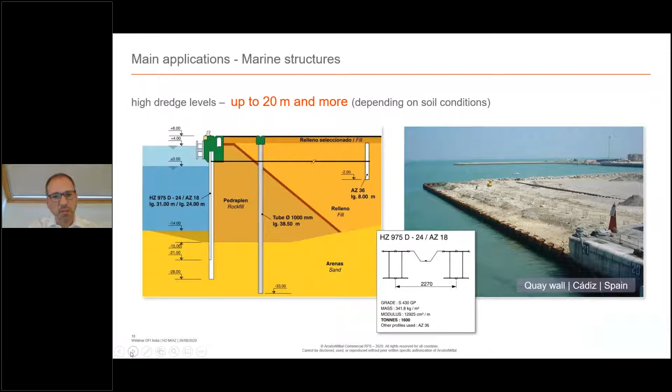And for flood protection systems, here it's a typical case where a standard sheet pile wall would have been possible, but in this case it's a cantilever wall, and so in order to reduce the deformations at the top of the sheet pile, it was decided to use a combined wall system due to its much higher inertia. So relatively small retaining height, but due to deflections, they used this type of solution.

The installation is made in a different way than regular sheet piles, so you need a template to install the sheet piles, and there is a specific driving sequence that you have to follow in order to do it correctly.

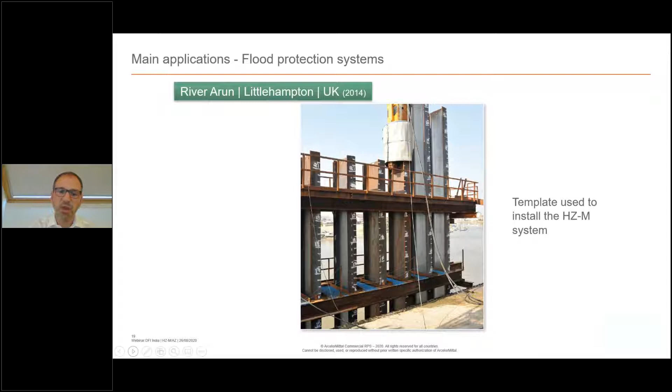Now, another type of application is bridge abutments. Normally, again, regular Z piles could be used, but in this case, very high loads, and you transmit also the loads from the deck to the sheet pile so that they can be transferred to the soil. So it's not only a retaining wall, but also a bearing pile, acting also as a bearing pile.

And now, temporary structures with this type of combined wall system are not used that often, but in very severe conditions, like you see it on the right, it's a very old picture of a cofferdam in the middle of the water where they had over 10 meters of water pressure. So they decided to use a combined wall system.

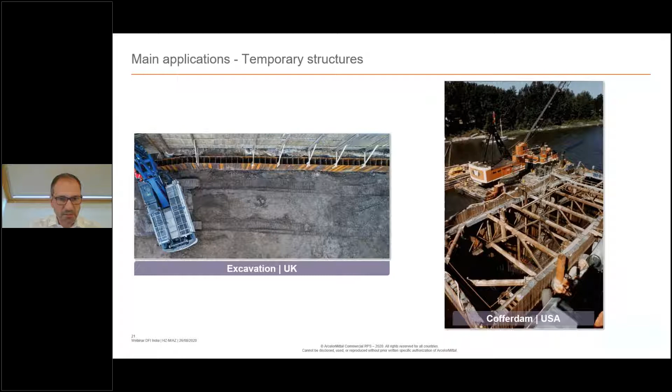But the sheet piles are very, very long. So here, the longest were up to 44 meters long. So you have also to imagine the equipment that you need to be able to drive such a long sheet pile into the soil. So this is also something that will be dealt with in one of the next webinars, a webinar with Mr. Ernst, who will focus on the installation.

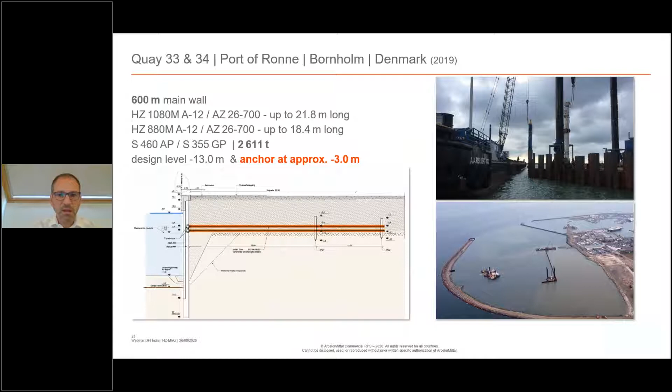Another interesting feature of the HZM system is when you have to dredge deeper. Here, for instance, they wanted to increase the dredge level by about 3 meters.

So here you can see it now normally, the deck on pile, and they wanted to increase the depth by about 3 meters. So the solution was to select a cantilever wall, which is relatively stiff. It was an HZ system, which was driven below water. The top of the sheet pile was at the existing dredge level. Once they had installed the sheet pile, they dredged in front of it so that it was a cantilever wall.

Now, what are the standards and recommendations that should be used when designing a sheet pile wall? In Europe, we use Eurocode 3, Part 5 for the piling, for the steel, and Eurocode 7 for the geotechnical design, that's Part 1 of Eurocode 7.

There are also standards relevant for the sheet piling, hot rolled steel sheet piling, the technical delivery conditions and the tolerances. This is very important. The execution of special geotechnical work is detailed in EN 12063, but we'll see that for combined wall systems, for instance, the tolerances are not dealt with in detail in this standard.

And then the types of inspection documents that you have to prescribe so that you get the correct material. There are also recommendations from the Committee for Waterfront Structures, Harbor and Waterways, the EAU as we call it in Germany.

Very interesting, very detailed, and they use a lot of steel sheet piles in Germany, so they have a lot of experience. This is the 8th edition, if I'm correct, so they improved it each time.

What they also have is the EAB, which is more for cofferdams. So if you're doing something on land, then it would be EAB. And then in the Netherlands, although this is only available in Dutch, but also very detailed for the design of sheet piling,

So focusing on the combined wall system, HZM, what is a combined wall system and what is particular about this specific one? The combined wall system consists of 3 elements. The first one is what we call a king pile. This can be an HZM, like in this case, but it could be something else. It could be a box pile, like a CAZ box pile, or it could be a tube.

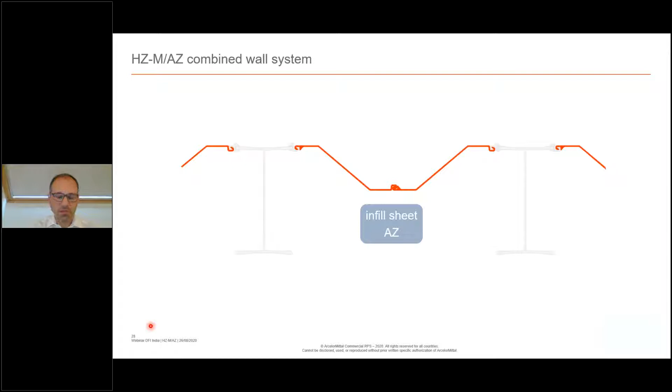And then you have infill sheet piles. In this case, we use exclusively AZ sheet piles. We will see also why AZ sheet piles are better in most cases. The third element is the connector. It's also a hot rolled connector, and it's partially welded to the king pile.

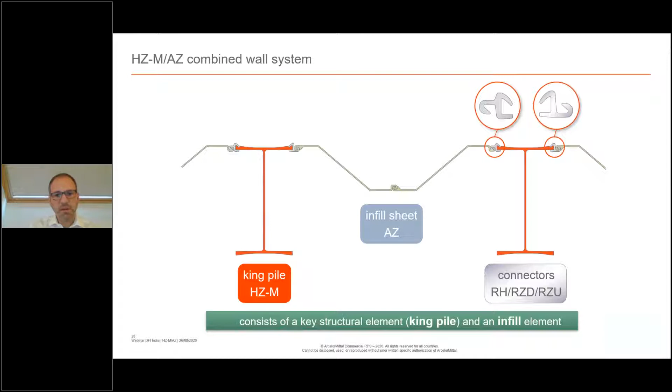So this is how to combine these different elements and how to build a continuous, and could also be watertight, sheet pile wall, as we'll see in one of the slides. So, king pile and infill sheet. If we focus on the king pile, the system is not that new. The first HZ was developed in the 70s, early in the 70s.

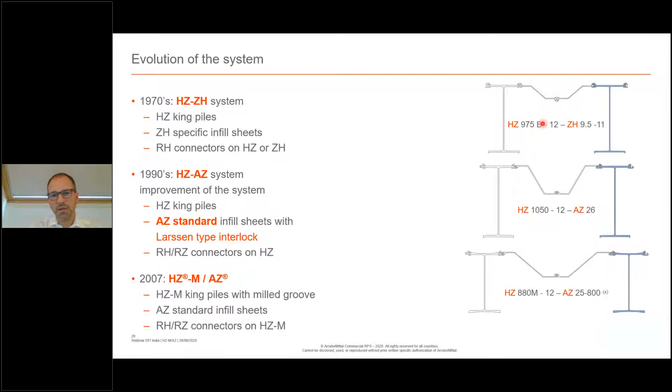But as you can see here on the top, the infill sheet piles were specific for this system. Later, with the development of the AZ sheet pile, we switched to a regular infill sheet. So it's something that can be used not only for the combined wall system, but also for a standard retaining wall. Later, in 2007, for a very specific project, we developed much more resistant, thicker king piles, but keeping the infill sheets, still the AZ, and the same connectors. So it's an evolution, like in most cases.

What changed, and what is very different for this king pile compared to a section, is that it's much wider. We're talking about sections between 420 for the smallest one up to 460 millimeters wide. They're very deep, above 1 meter high for the highest one, like jumbos that are also used for high-rise buildings. Also the distinctive feature, different from other solutions, is that we have a groove which is milled, within very strict tolerances so that the connector fits perfectly in this type of flange.

There are different elements, so different thicknesses, different heights. We start with a very small one, which we call the 630. Then you have one which is a little bit higher, the 880.

And then the largest ones are the 1080 and the 1180M. As you can see, the thickness of the flanges also increases. We have a specific slide about the thicknesses in one of the next slides.

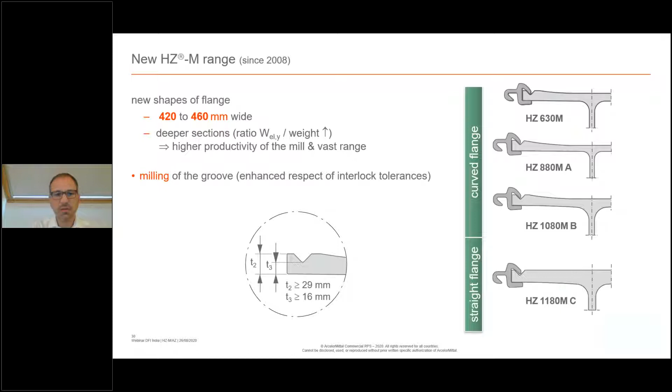The connectors, there are 2 of them, actually 3 of them. Those connect the sheet piles, the infill sheets, to the king piles. We call them RZ, RZD and RZU. It's almost the same shape, but due to the interlock type, you have to select the correct one.

And then the RH connectors are used to connect 2 king piles together, either to build a box pile, like we'll see, or to build a wall without any infill sheets, which is a much stiffer one. So the connectors are hot rolled connectors.

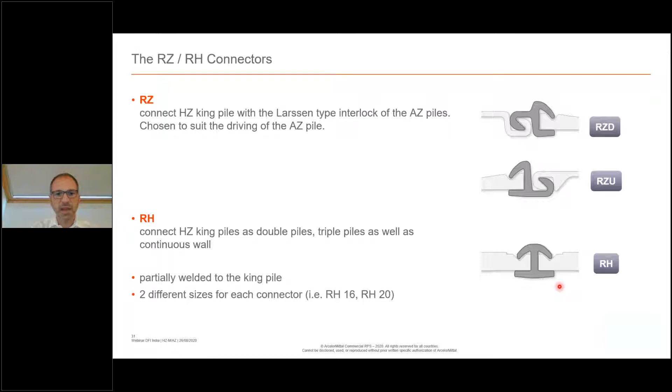They're also partially welded to the king pile, around 10% of the length. And then there are 2 sizes that are required because of the varying thickness of the flanges, in order to fit perfectly the flange thicknesses.

So in our brochure, you'll see different solutions and different combinations. So what we call a solution is simply the king pile. And as you'll see, a solution 12, for instance, is 1 king pile with 2 connectors. Solution 14 that you see here is a solution where you have 1 king pile and 4 connectors.

The advantage of a solution 14 is that it's almost a symmetrical profile. However, the disadvantage is that the connectors are a little bit more expensive and that you also need to weld them, so most of the time a solution 12 will be more cost effective than a solution 14, but you have to switch also the king pile, so you have to take a larger king pile.

And it's the same thing for the box piles that we call solution 24 and solution 26. So solution 26 is 2 king piles connected with these RH connectors and 4 other connectors.

A combination is the combination of a solution, so solution 12 plus infill sheet makes combination 12. The same thing with solution 14 makes combination 14, and so on. So relatively easy to understand. Also in our catalog, where to find these different types and what it makes.

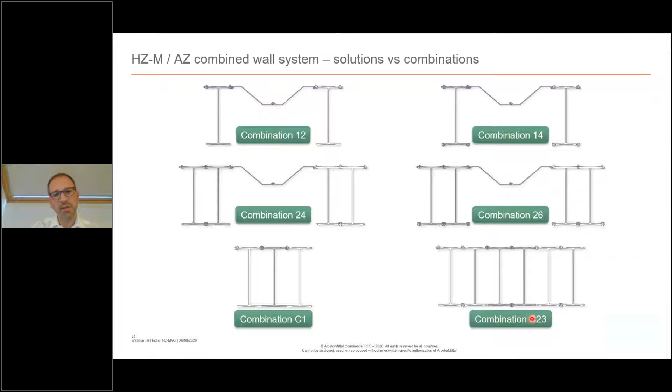So combination C1 means that you have 1 king pile that will be driven as a single pile, and combination C23 means you have a box pile that is supplied as a box pile, so 2 or even more. We have also sometimes supplied 3 HZ as a box pile, but then you also have to handle it, lift it, and drive it into the ground. So that's something that has to be taken into account when ordering and designing them.

So as I said, there are 4 different sections with different thicknesses. I won't go into the detail, but we start at a thickness of about 20 millimeters for the very small one, and we go up to about 40 millimeters for the very thick one, with the height of the section of about 1100 millimeters approximately. So there are different thicknesses for each, so that you can actually optimize the solution depending on your requirements.

And as I said, depending on your requirements, you can have a very small elastic section modulus. So here we have, for instance, a combination with 4,000 cubic centimeters per meter. This is the equivalent to an AZ40, for instance, but the inertia is much higher. So the inertia here would be about 50% to 100% higher than an equivalent Z pile.

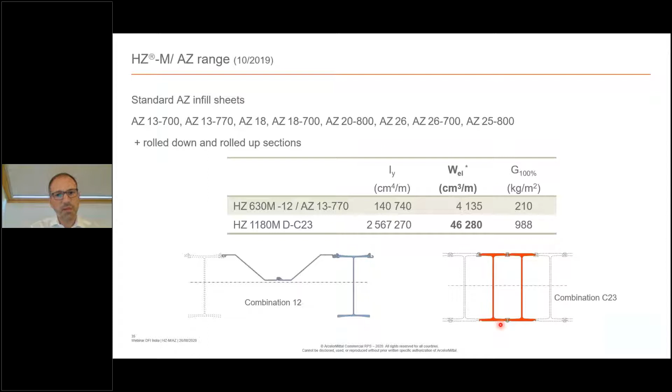And if you don't use any infill sheets, as a combination C23, we can go up to 46,000 cubic centimeters per meter for the elastic section modulus. But on the other side, the weight that you have to consider is about 1 ton per square meter. So if you take one of those box piles that is 40 meters long, this means that it's about 40 tons heavy. So you need the equipment to handle it, but also to drive it into the ground.

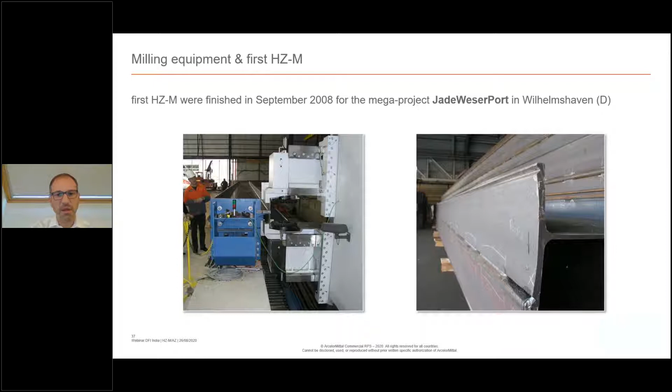So it's relatively quick and, as we said at the beginning, very small tolerances. Now, the HZM system, as I said, consists of two elements, but the infill sheet is there mostly to transmit the horizontal loads to the king piles. So the vertical loads, if you have vertical loads from a bridge abutment, for instance, will be transmitted solely to the king piles. And the other advantage of the AZ sheet piles is that they adapt very well to driving tolerances.

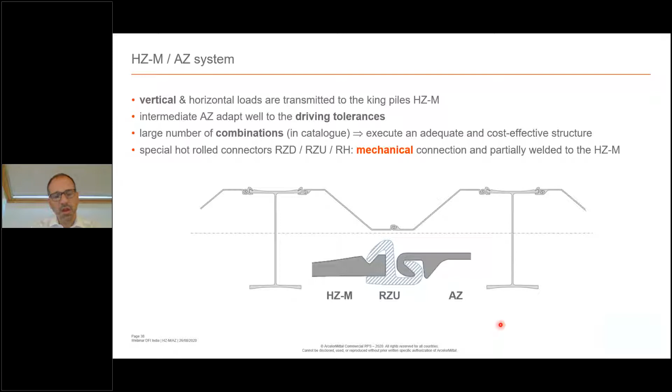The other advantage of a combined wall system, HZM, with the RH connectors, is that you have a mechanical connection. So you partially weld the connectors to the HZ, but even if it would break for some reasons, you would still have a continuous wall, which is not the case for other solutions, also with the king pile walls and infill sheets.

So how to design and how to determine the stresses in both elements. It's relatively simple, but you have to do some assumptions. The easiest way to explain this is to take the global safety factor approach, where we don't have any partial safety factor. So we have to make an assumption, and the assumption is that the bending moment of the wall will be transmitted to the elements proportionally to their stiffness.

The king pile is much stiffer, so the bending moment will be transmitted mostly to the king pile, and the infill sheet, as I said, will transmit the horizontal loads and can take a small portion of the bending moment loads. So the inertia of the system is simply the sum of the inertia of the king pile and the inertia of the AZ, and you'll find this information in more detail in the brochure.

And you assume that the bending moment is also distributed into the HZM and the infill sheets. Now, you have to calculate the bending moment that is transmitted to the HZM, and once you have calculated that, you have to verify the stresses in the HZM and also in the connectors. Those are the formulas that you see here.

It's relatively simple. In our brochure, you'll find what we call equivalent section modulus—two values, one for the HZ and one for the connectors, because they don't necessarily have the same stresses, and they don't necessarily have the same yield strengths. This is how you can calculate the stresses in those two elements.

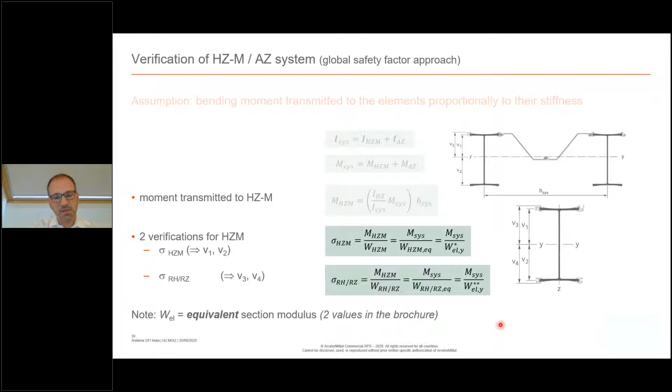What you can also deduce from these assumptions and results is that usually the infill sheet pile doesn't need to have a very high yield strength. Generally an S270 GP would be sufficient, unless you need it for driving reasons, if you're driving into very compact soils, or for water pressure reasons, as you'll see in one of the other slides.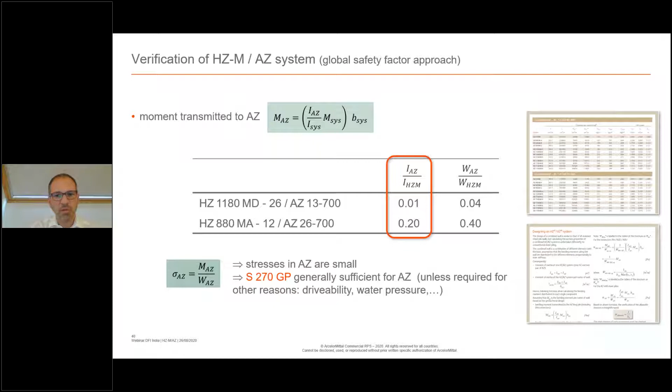All this information you can find in our brochure. You can also find it in the brochures of other manufacturers, because this is the essential data that you need in order to design a sheet pile wall. You've also seen this slide in the first webinar.

We have also supplied for some of the projects ASTM A690. That was the case, for instance, for a large project in Poland about 10 years ago. And we can also add some copper if the customer requires it.

Usually it's a little bit more resistant to corrosion in a marine environment. So as I said, all these verifications according to the global safety factor approach, not the Eurocode, can be done with the software that you can download from our website.

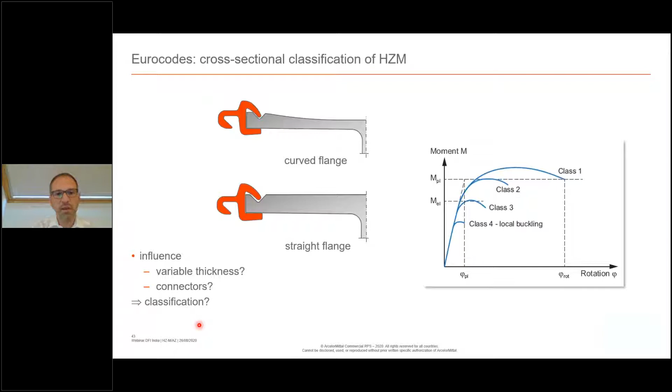This is relatively easy to determine for sections, because there was a lot of research done. But for curved flanges like we have here, or flanges which are not straight but with a connector, it does not necessarily apply. So some years ago we had to do research and testing in the laboratory, done with the University of Aachen in Germany.

These finite elements and background calculations showed that almost all the solutions were class 2, except for solution 12 and solution 24, which are class 3. This means that for all of them you can use at least the elastic section modulus for all the steel grades. Quite interesting, because it was not that easy. If you use the method from the sections alone, then some would fall into class 4.

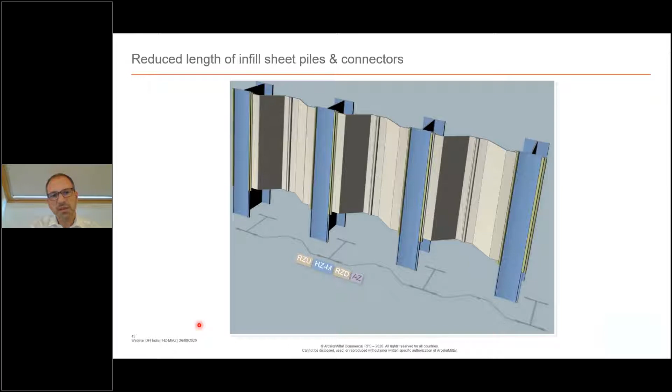Another interesting thing is that the infill sheet pile does not need to have the same length as the king pile. We can actually take into account a passive 3D effect, but this depends on the distance between the king piles. If the king piles are within 1500 millimeters, or 1.8 meters for U piles, then you can assume that it's a continuous wall.

If the distance between the king piles is above this value, and this is also given in Eurocode, then you have to take this into account—you cannot necessarily assume it without verification. You still can do verifications to make sure you have this passive 3D effect, but it's not given without any additional verification. So with this type of solution, you can save money, and also steel, which is also good for the environment.

Typically, the length of the infill sheet piles is within 60 to 80% of the length, unless you have a cantilever wall or a very soft soil.

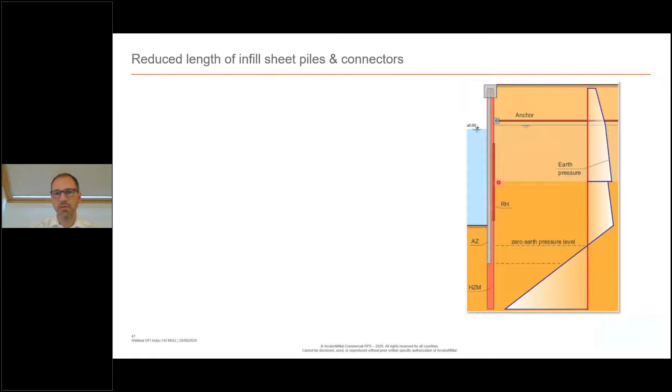Here is a cross section of an anchored wall. You see that the RH connectors, for instance, you only put them where you need this maximum bending moment. So you can not only play with the length of the infill sheets, but if you have a combination like 24, 26, or 14, you can also adapt the length of the connectors.

Normally, the tip of the infill sheet pile should be at least 2 meters below the elevation where you have the zero earth pressure level, where active and passive pressures are equal. But also it should be at least 5 meters of embedment, depending on the soil conditions.

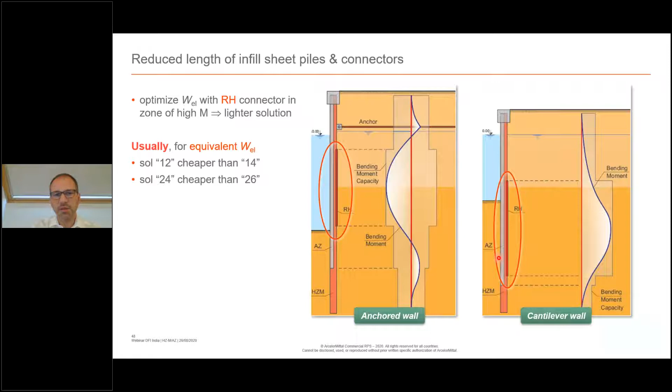I already told you that solution 12 would normally be cheaper than solution 14, but you also have to verify that the stiffness is sufficient. Solution 24 is cheaper than solution 26, 12, and 14, but as I said, you can also optimize the length of the connectors based on the bending moment.

For the infill sheets, why do we prefer Z-piles? For two reasons. The first is that a Z pile has a rotational capacity of about 5 degrees per interlock, which is not that much. But without any deformation, you can actually achieve an increase or decrease in the width of about 100 millimeters for most of the piles.

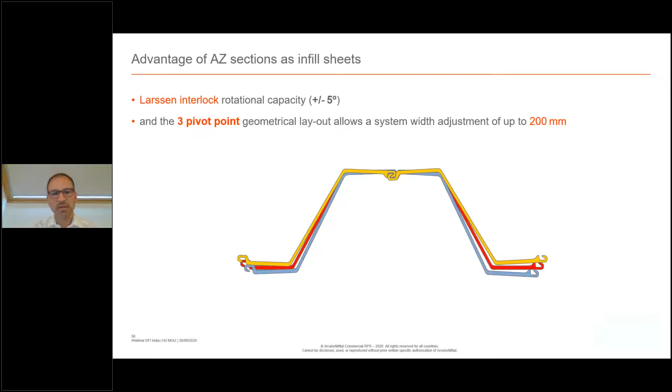With a small deformation, you can adjust it to about 200 millimeters. Based on our experience, the Z pile is better than the U pile because it doesn't have the interlocks on the neutral axis. If you are within 200 millimeters of installation tolerances, the infill sheet will adapt to these tolerances. When you drive the king piles first, you will never have a sheet pile or king pile which is perfectly vertical. There are some tolerances, but achieving zero is almost impossible. That's the advantage of the infill sheet, which is a Z pile.

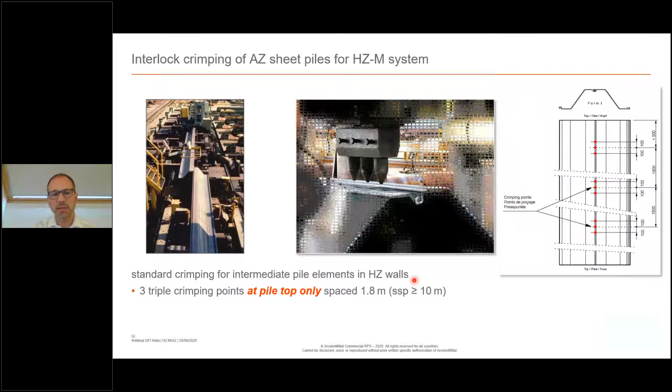However, most of the time, the infill sheet piles are crimped at the top, so you have 3 times 3 crimping points. This is more for handling the double piles so that you can lift them. You should avoid crimping at the tip because you need this flexibility in order to adapt to the installation tolerances of the Z piles.

We've seen that the yield stress of the king pile might be different from the yield stress of the infill sheet and from the connectors. So this is something you can try to optimize, because if you go to a very high strength, you have to pay a slight premium, but for the infill sheet piles, you don't necessarily need this.

The tip of the pile, you can also shorten it. It has to be at least 2 meters below the total zero pressure, and the embedment of the HZ must be at least 5 meters. We also recommend the AZ should be at least 5 meters, and most of the time it is. If you have very long piles, longer than 20 meters, we recommend using a slightly stiffer pile, not too stiff. So AZ48 700 is not recommended at all - it would be too stiff, but an AZ13 might not be sufficient to drive them. Of course, it depends a lot on the soil conditions and the installation equipment you have.

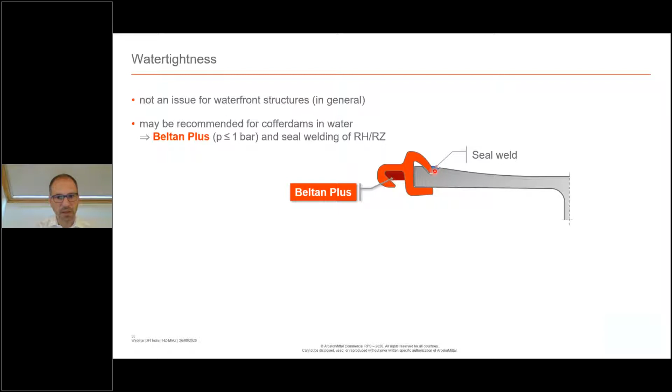For water tightness, we have also some solutions. This is typically for a cofferdam, not for a waterfront structure. You can use what we call Beltan Plus, a bituminous product that you put into the interlocks, and then you seal weld in between the structural welds. Or you have a compressive system where you use the AKILA system in the interlocks, but you also have to seal weld in between.

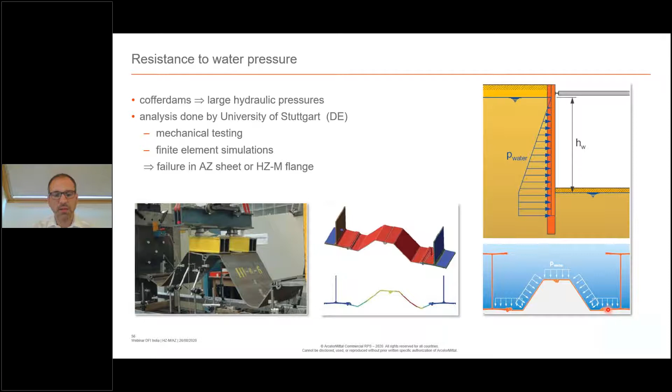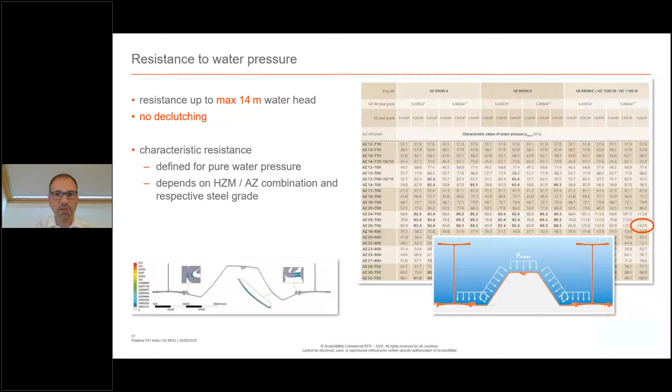We have done some simulations and testing in the laboratory to make sure they can resist a lot of water pressure. The result is that if you have water pressure in this typical configuration - we can also turn it upside down and it will resist high water pressure - we can resist about 14 meters with our sheet piles and the HZ without any declutching. But this is only valid for our system, because you might have failure in the HZ or AZ if it's very sensitive to tolerances, shape, and interlock. 14 meters of water pressure is already a lot, but sometimes you have to go higher.

For the delivery conditions, it's the same as we've seen in the first webinar - plus and minus 5% of the mass, and so on. Straightness and length are regulated in EN 10248, also plus minus 7 millimeters, and plus minus 7 for the HZ. This is relatively standard.

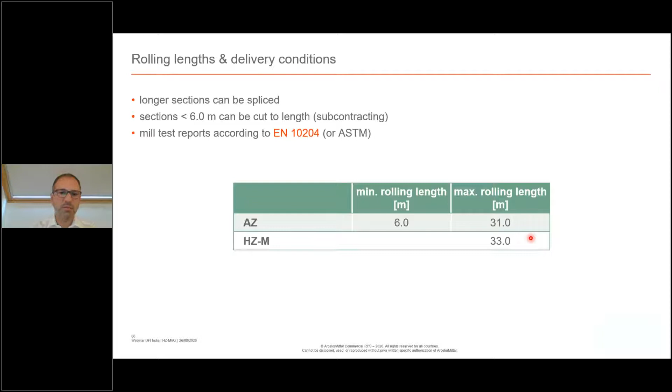For the rolling lengths, AZ can be rolled up to 31 meters. If you need longer lengths, we have to splice them. The HZM comes from another mill in Luxembourg, 33 meters. If you have to splice it, it's feasible but has an additional cost. Very often we had the case where they wanted 33.5 or 34 meters. Then you have to check if it's better to position the anchor a little deeper or reduce the length of the sheet pile at the top, so you can make it with 33 meters rather than paying for the splicing.

But of course, if you have 44-meter long piles, you don't have any other choice than to splice it. There are also some forms for the delivery - the difference is where we weld the connector. In form A, we weld the connector only to one of the piles, but form B is the standard where we weld the connector to both piles. So unless there is a good reason, we will supply form B.

As I said, there's 10%. So every meter you have 10 centimeters of welding, which is 6 millimeters thick. And then at the top and at the tip, you have 500 millimeters.

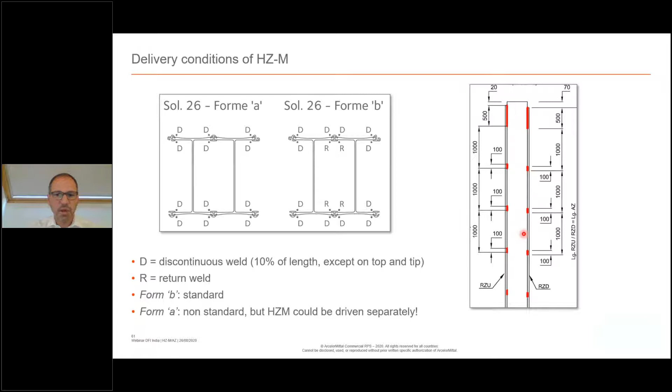However, in Germany, they are a little bit more strict. At the tip and at the top, they want at least 3 meters and 20% over the length. So it is feasible, but it has an additional cost. If you have very hard driving conditions, then it makes sense. If it's regular driving conditions, then this is more than sufficient.

And if you have to seal weld, as you see it here, then you can seal weld it in between this structural weld. So instead of 6 millimeters, you'll have only 4 millimeters thickness.

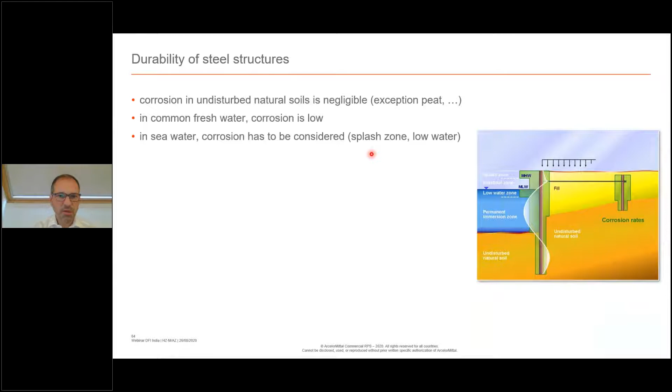Durability doesn't change anything. It's steel, so it corrodes. In undisturbed natural soil, not that much - you can even neglect it. But in seawater, you have to take that into account.

Mostly in the splash zone and also in the low water zone - that's the most aggressive zones that you have. Luckily, the permanent immersion zone, where you have less corrosion rates, is where you have also the bending moments that are maximum, so the maximum stresses in the steel. By playing with the length of the pile, but also the position of the anchor, you can actually also change the position of the maximum bending moment so that it will never be in one of those very highly corrosive zones.

However, there is a small difference between a combined wall system and a standard sheet pile. Imagine that you have a waterfront structure, so the water is more corrosive than the soil - you have less surface in contact with water than compared with the standard Z pile.

We did this for a specific equivalent solution a couple of years ago. So you see that after 50 years, the difference in elastic section modulus would be about 6%.

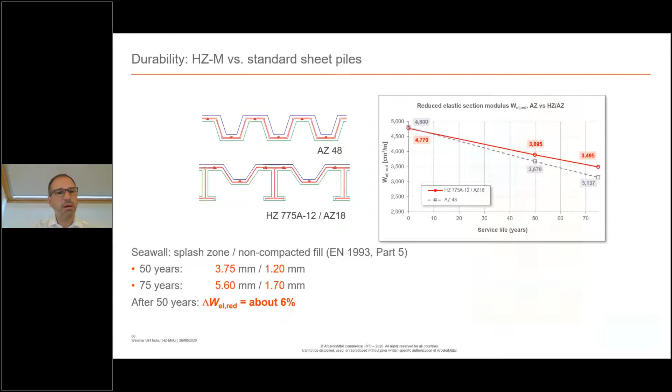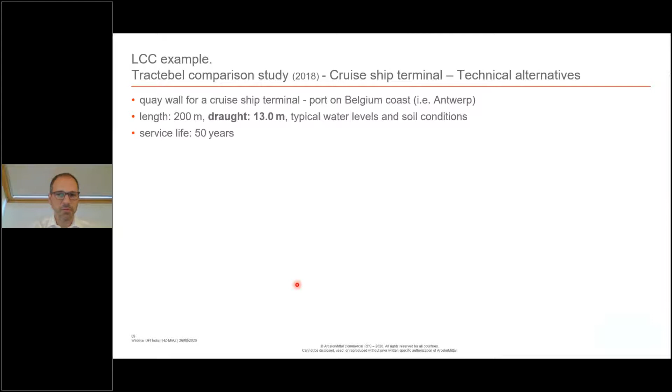Now we did a market analysis for a typical quay wall for a cruise ship terminal in Belgium, with a draft of about 13 meters and a length of 200 meters.

We compared the sheet pile wall solution with a deck-on-pile and with a diaphragm wall, and we did different solutions for the sheet pile, so regular sheet pile, HZ, and also tubes. This is interesting because for this specific draft and under those soil conditions, the sheet pile wall turned out to be 15% cheaper than a concrete diaphragm wall.

But why did we choose these 13 meters of draft? The reason is very simple. We know that in the Netherlands, Germany, and Belgium, if you have less than 10 meters, then the sheet pile solution is the solution that will be used because it's cheaper.

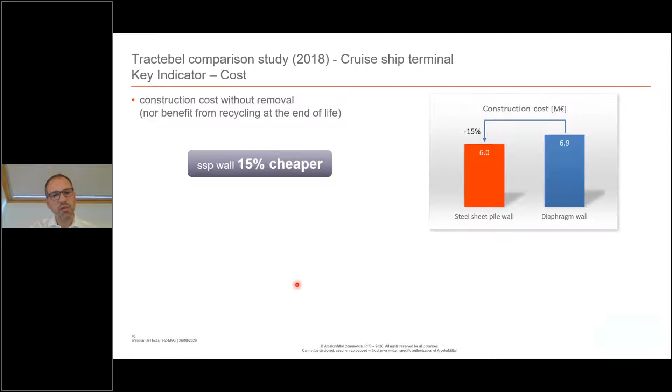And if you go above 15 meters, then of course the technical solution for a sheet pile is still possible, but a diaphragm wall will probably be as cost effective, if not cheaper. So this is the range between 10 and 15 where a sheet pile wall, combined wall system, and a diaphragm wall are competing, and that's why we wanted to analyze this type of solution.

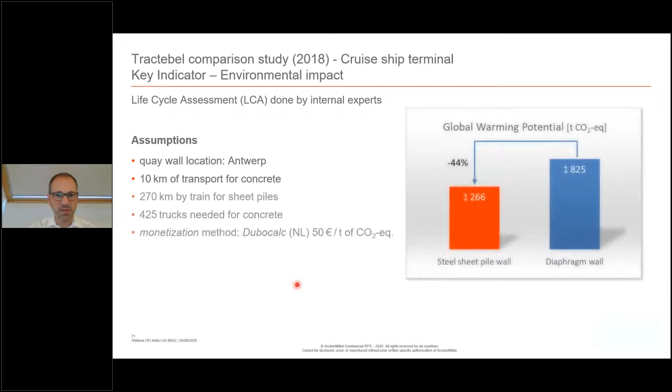From a life cycle assessment, which is also very important because we want to reduce the environmental impact, we analyzed an indicator which is a CO2 equivalent, and in this case, under those assumptions, the sheet pile wall has 44% less environmental impact. But of course, this applies only to this specific project and under those conditions.

This life cycle assessment is being peer reviewed by an expert group. For the installation, you'll have more details in the next webinar.

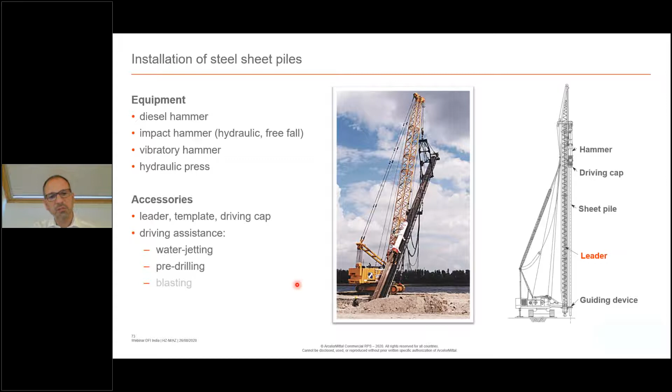So you can use diesel hammers, impact hammers, vibratory hammers. Hydraulic presses are not used that much for the HZ system, but they can be used for tubes, for instance, the solution from Giken. Then you have the accessories, which you call leader, as you can see on the pictures, to make sure that you lead the pile correctly.

Driving assistance like water jetting, pre-drilling, if you are in soils like sandy soils, can be very helpful. If you use an impact hammer, it's very important to distribute the energy correctly into the whole sheet pile. So you see here a driving cap which is adapted specifically for the king piles, and the energy will be transmitted to the whole king piles except the connectors.

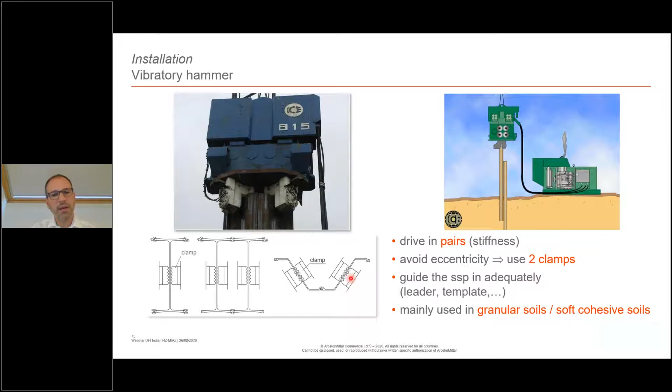With a vibratory hammer, we always prefer to use double clamps if you have a box pile, or if you have infill sheet piles, also to use double clamps. We know it works in some conditions also with single clamps, but it takes probably a little bit more time, and you might damage the sheet piles, be it the king piles or the infill sheets.

There is a specific driving sequence, we call it pilgrim step. First of all, you install the king piles with the template, and then you install the infill sheets. There's also what we call a pilgrim step, which you see in the video, meaning that you don't drive one pile after the other. There is a sequence you have to follow in order to be sure that on both sides of the king pile you're driving, you have either compacted soil or uncompacted soil.

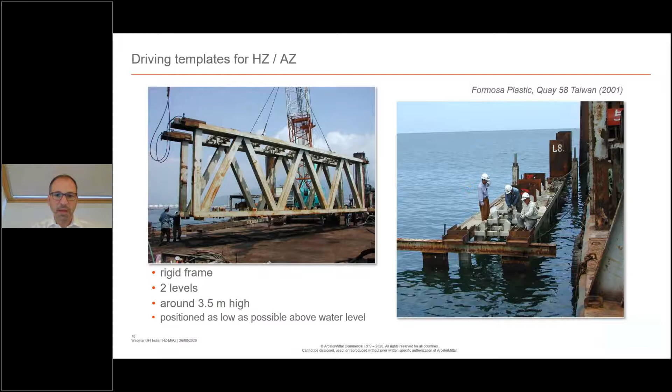The template has to be relatively rigid. Normally it's a 2-level template, and the height may vary between 3 and 5 meters. Here it's 3.5 meters high for a specific project in Taiwan. As you can see, it's a rigid frame. It will depend also on the length of the pile, and then you have to guide it.

This was the old system, the HZ. You see here how it was guided, but we prefer to have a solution with rolls, not necessarily rubber rolls, but rubber rolls if you have a coating, of course, to prevent damaging the coating.

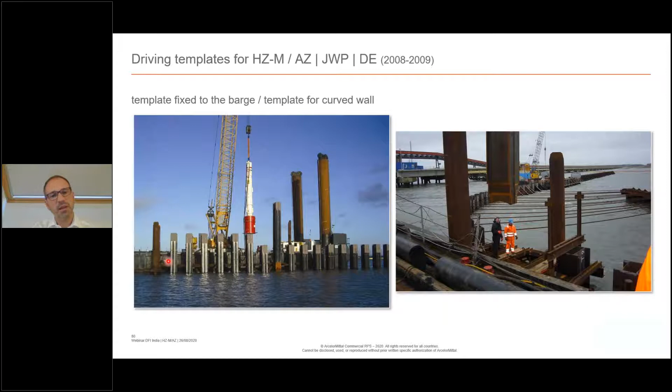This is a nice picture because here it's a different solution. It's in Germany, at JadeWeserPort, where they fix the template to a barge, a jack-up barge, and then they drive the king piles. So you don't necessarily need a template like you saw, but you can also use other alternatives as long as you can guarantee the verticality of the piles.

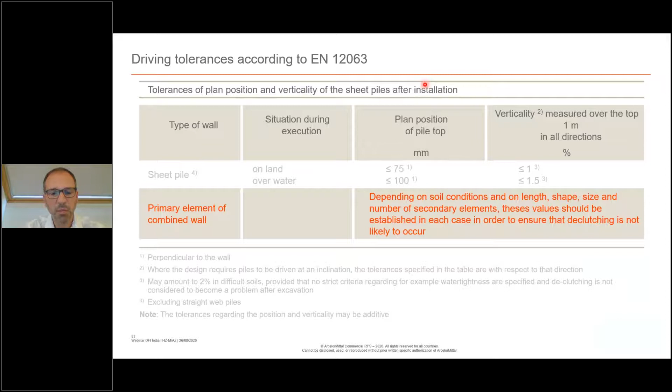The other thing you saw, which I didn't mention, is that normally you start installing the king piles with a vibratory hammer, and then when you get stuck, when you go to refusal, you drive the last meters with an impact hammer if required. But infill sheet piles are normally always driven with a vibratory hammer.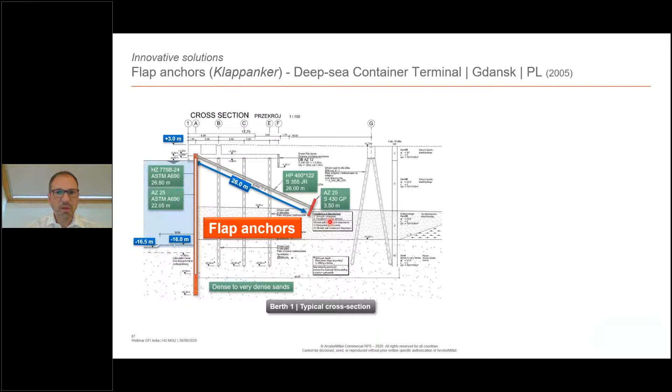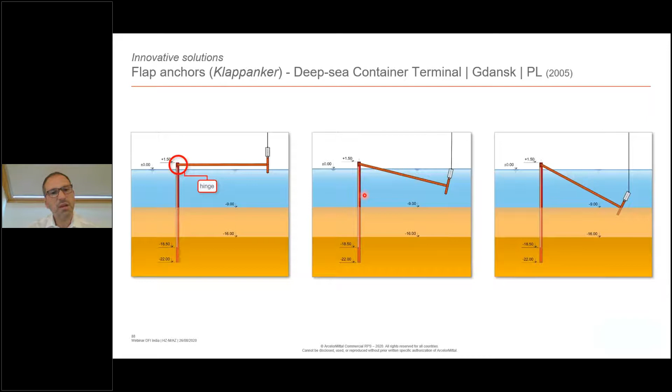Another way to optimize, in certain conditions—for instance this was in Gdansk—is what we call flap anchors, or Klappanker in German. Relatively good solution with the hinge here that you can see. Then you prepare the anchor wall: the sheet pile anchors are fixed to the H-beam, which can be very long, and then you simply drive it into the soil. If the soil is at minus 16, that's the way, and then you backfill behind. It's relatively simple, doesn't work in all conditions, but when it works it's a very competitive and quite innovative solution. It has been done in Poland and a couple of times in Germany.

Then this is the nice picture we also saw in the animation—a double wall, built like a jetty and then backfilled behind. As you can see, the advantage is that they work from the portion already installed, with the infill sheets fed in on a barge.

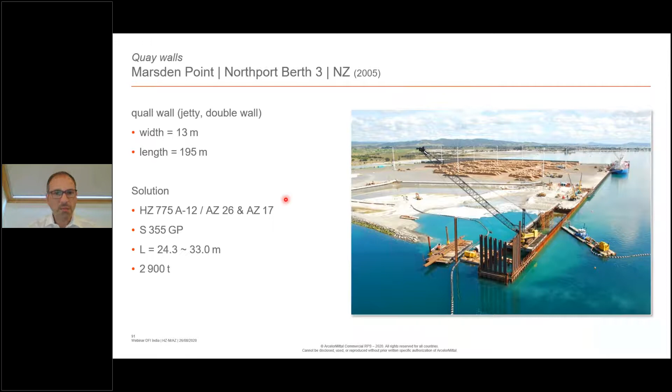Another project, the locks in Venice. Most of it you don't see anymore, but we supplied around 150,000 tons, also for the gates that have been built, which will protect, hopefully from next year on, the Laguna.

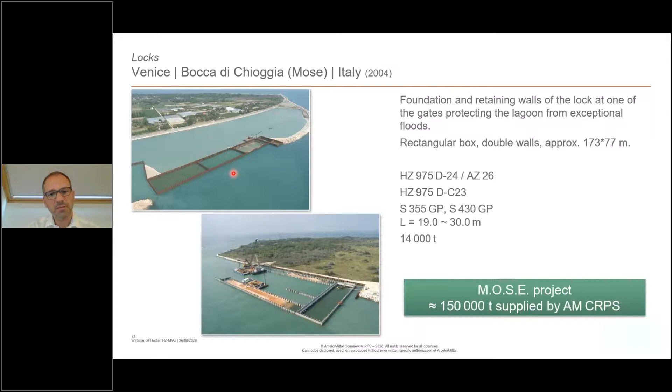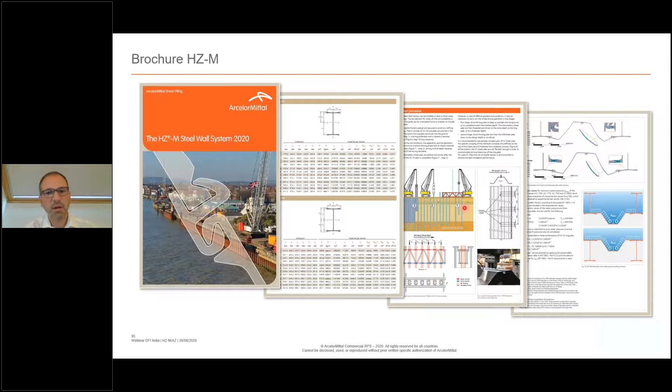And just to finish, so you have all this information—the technical details, but also data in the brochure, including water pressure resistance and so on. Have a look at it, and also our website, where you can find some details and the software you can download, as I mentioned. Thank you very much for your attention.

Hopefully you had some questions. Thank you, sir. Thank you for the wonderful presentation.